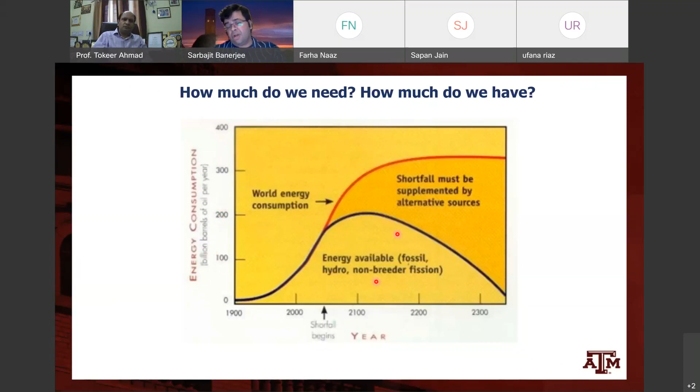And these are some numbers from an article by Lewis and Nocera, and also relying on some analysis in this DOE report. Okay, well, our population in 2001 was 6 billion, projected to increase to 9.4 billion, and then ultimately about 10 billion. So our population isn't increasing as fast as it used to. That's a good sign, but it's nevertheless going to increase quite a bit before it stabilizes, right?

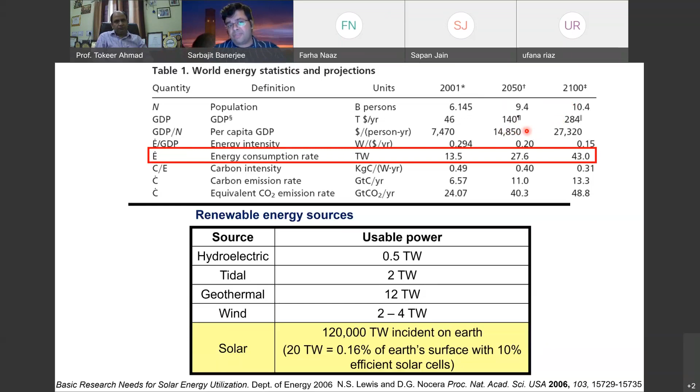The GDP is going to hopefully increase. This is a good thing. And our per capita GDP is also going to increase as more and more populations across the world come out of poverty. And this is of course fantastic. Science is enabling, technology is enabling more and more people across the world to come out of poverty.

But this will require a greater fraction of energy, because the energy that is going to be required to meet the needs of this growing population that has a higher income is going to be substantial. So our energy intensity per person, or per year, will decrease, right? But the energy consumption rate is going to massively increase.

So here are some numbers to keep in mind, and of course there's lots of approximations here: from 13.5 terawatts in 2001 to 27.6 terawatts in 2050 to 43 terawatts in 2100, really big. So by 2050, we're going to essentially need to be producing over twice the energy we were using just about 20 years ago. So this is a huge number in terms of how much energy the world's going to need.

And the carbon intensity of energy is also decreasing. Again, this is a good thing as we are in the midst of this massive energy transition, but is this good enough?

Okay, so this is something we're going to have to consider. Is it good enough to save us from the catastrophic aspects of climate change, right? And so we'll have to think about this. So if you think about where we're going to get this energy from, okay, so we have this massive shortfall that is looming on the horizon.

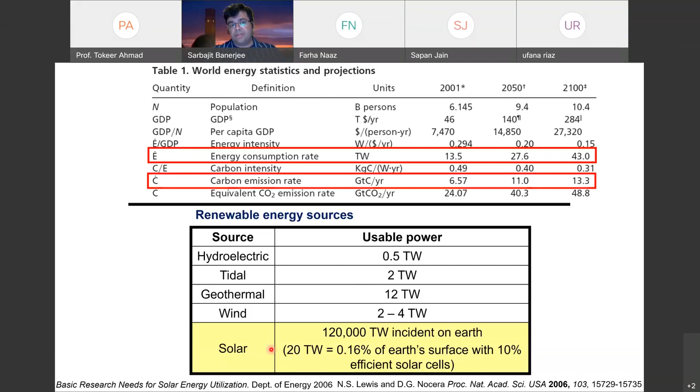Okay, so this is a report I pulled from the U.S. Energy Information Administration as to what are the sources of energy and where do we actually end up using the energy. So if you take a look at these numbers, the big source is still petroleum. Okay, so gasoline, as it's called in the U.S., or petrol as it's called in India, still almost 36% of energy that is used in the U.S. is gasoline, right? Where does it go? Not surprisingly, 71% of this gasoline is used for transportation. 23% of it finds industrial use.

Okay, and one of the things to consider as we talk about energy is of course it's interconnected, right? This is why energy is not just what comes into our homes or what powers our transportation, but it's also our industry. It is also the very way we live our lives, right? So especially as chemists, this is an event hosted by the Department of Chemistry. Our chemical industry is extremely reliant on gasoline as its fundamental feedstock, right? So almost every organic chemical that you buy has started its life as some sort of gasoline byproduct, and so this is something that you can see here. 23% of all petroleum is actually going towards industrial uses, of which a lot of this is in the chemical industry, right? Then you've got 5% going towards residential and commercial, and 1%, so not very much petroleum, of course, used for electricity, right?

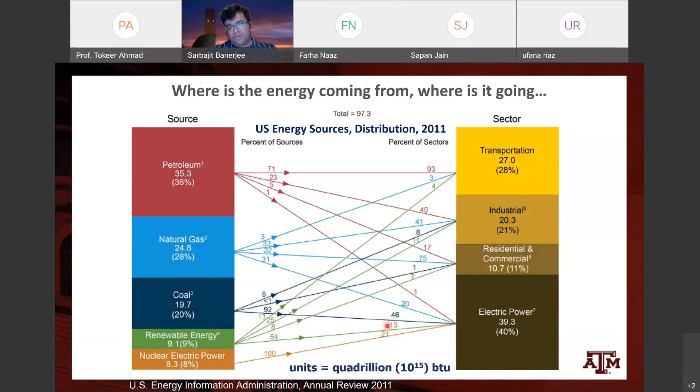So let's break this down a little bit. Let's talk about this part of the grid, the segment here, electric power generation, mostly the electric grid. In my first talk, I discussed this a little bit, but this is something that obviously affects all of us, and we talked about this. The grid is, in a sense, this is a quote from the Atlantic Monthly.

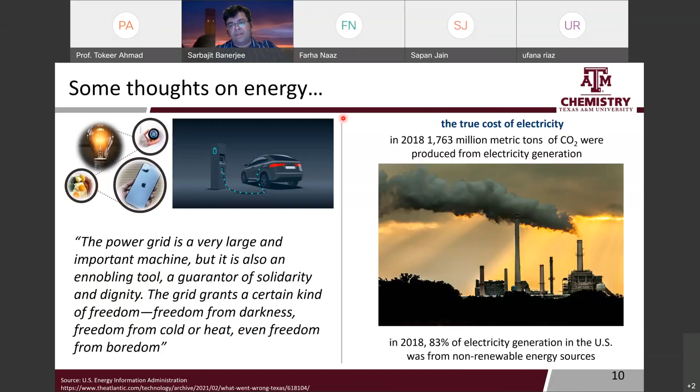It gives us freedom. Having power in our homes, having power in our offices gives us freedom from darkness, freedom from cold or heat, freedom from boredom, and the freedom for me to sit thousands of miles away and talk to you, right? This is all enabled by the grid. But again, this comes at a cost of millions of metric tons of CO2, right?

So let's think about the grid here. Where is this energy coming from? Again, not gasoline, not petrol. Petrol is mostly going towards transportation. A lot of energy coming from natural gas, a big chunk from coal, some from renewable energy, and some from nuclear power, right? So it's a pretty big mix here.

And the grid today is still very much reliant on fossil fuels, on coal and on natural gas, and relatively less so on renewable power like windmills and such. So this is again a quick recap. 2011, natural gas, electricity sources 24.8%. Then we've got nuclear about 20%. Hydroelectric is large among the renewables. Coal in 2011 was very big, about 40%. It's smaller now, right?

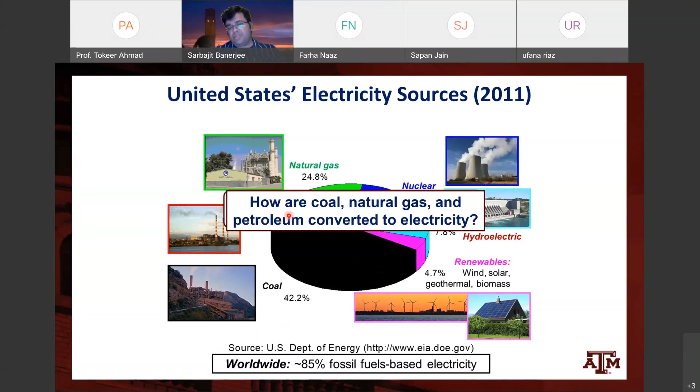So how do you actually convert coal, natural gas, and petroleum to electricity, right? So this is a stylized schematic of a coal-fired plant. This is the chemical reaction for what happens there. Essentially, you burn coal, you combust coal, right? This is an exothermic reaction. So you burn coal, you generate carbon dioxide, and release it right out of the stacks here, along with a whole bunch of other toxic materials.

Coal, of course, is a natural resource. You take it out of the ground, but it's not pure carbon. A lot of it is pure carbon, but being a fossil fuel source, it has sources of sulfur, it has sources of nitrogen, which gives rise to SOx emissions, NOx emissions, often things like mercury emissions, some of which are mitigated at the stack, some of which are not adequately mitigated and are emitted out into the environment.

So you burn carbon, you generate carbon dioxide, and it's an exothermic reaction, so you generate a bunch of heat. You take the heat and use it to essentially boil water in a boiler. The steam that you generate moves a turbine, and the turbine results in power generation, right? So really what we're doing is running a gigantic kettle by burning coal, to boil water and to move a turbine, right?

So it's not very efficient in many of these processes. Combustion is not very efficient. The boiling of water has inefficiencies, and then of course the catastrophic consequences of emitting all this carbon are pretty obvious, right? And a similar idea with natural gas, methane as an example. You burn methane and you generate CO2 and water and heat, and again use that heat to run boilers and essentially run a turbine, and that allows you to generate power. Again, you emit carbon dioxide and water vapor out into the environment.

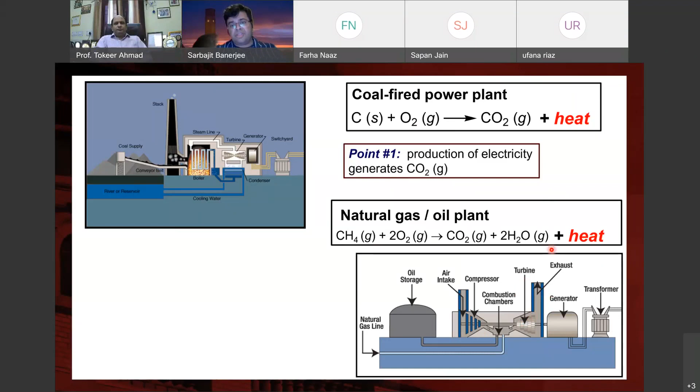So point one, essentially you can see here the production of electricity generates carbon dioxide, right? So this is a major problem.

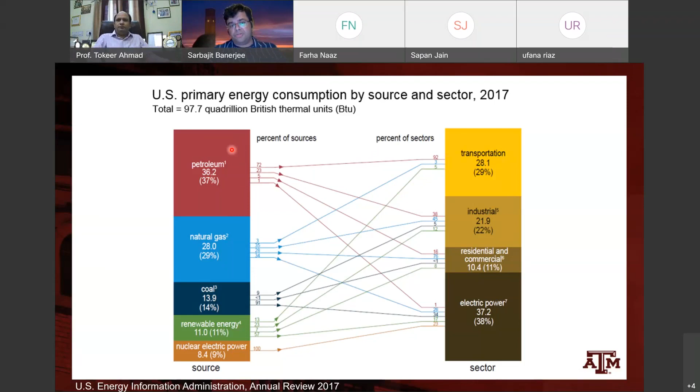If you consider transportation, if you take a look at this part of the picture here, most of the energy for transportation is coming from petroleum. Some of it is coming from natural gas, and only a minor fraction in 2017 coming from renewable energy, about 5%, right? So very heavily dependent on petroleum as our means of mobility. This is true for cars, airplanes, and ships. So we're extensively dependent on gasoline, on petrol to run this. And again, the reaction there, the fuel, essentially hydrocarbons, right?

Hydrocarbons that we combust using oxygen to generate CO2 and water. So one more point to keep in mind, just amplifying the previous point, is that internal combustion engines also will generate CO2, right? And so this is the challenge here. Most of this, again, coming from petrol, right?

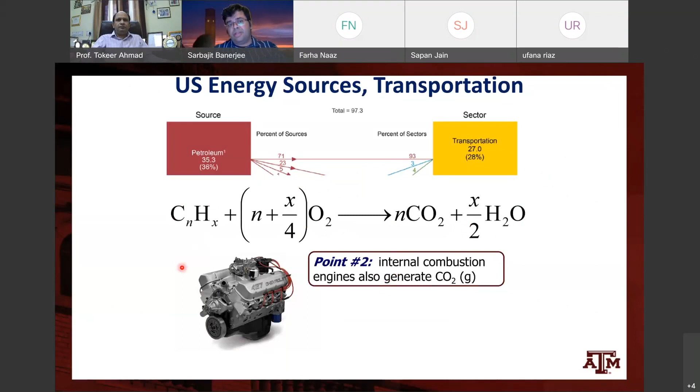So historically in the U.S., and this is something to keep in mind, if you go back and look at the literature 15 or 20 years ago, people were predicting a much sharper acceleration of the green energy transition. It's been slower because it's a moving target, right? Fracking and enhanced oil recovery methods have made extraction of petroleum much easier.

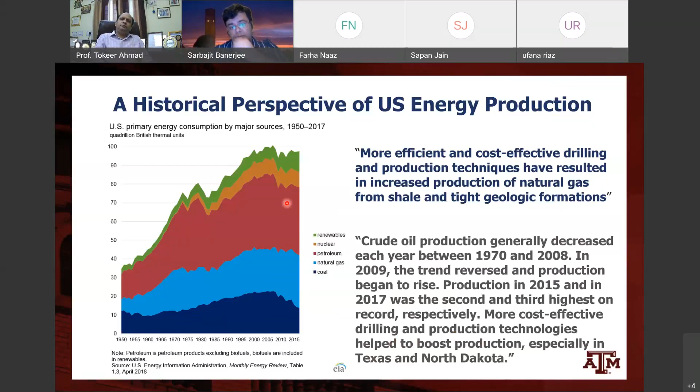So worldwide projected reserves of accessible petroleum have really dramatically increased, and there is a boom in the production of oil in the last couple of decades, especially in West Texas, in the Permian Basin, and in North Dakota, where cost-effective drilling and production technologies have led to this massive resurgence of petroleum production, right? And this has renewed the idea of energy independence in the U.S.

But one thing to keep in mind: as we exhaust our sources of light crude oil, we're moving more and more into heavy crude and unconventional deposits, and they can yield reasonable quality oil, but oftentimes the processing is a lot more energy intensive to produce the same amount of oil. They also typically have very high sulfur content. So lots of processing required, and danger of SOx emissions and such, right?

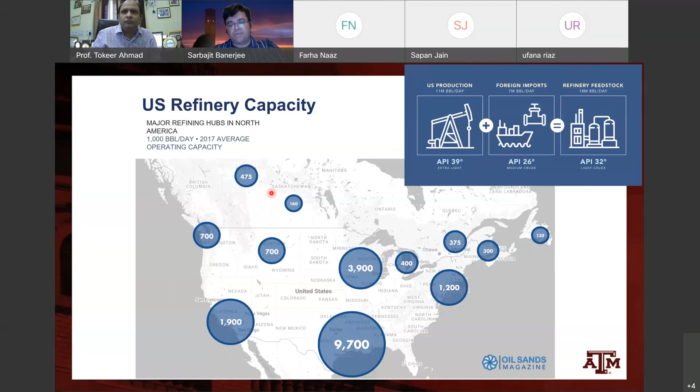So light sweet feedstock, we're still doing okay. This is Saudi crude, this is West Texas crude, and it can be handled relatively easily. But more and more, there's a reliance on heavy sour crude coming from Canada and Venezuela, which requires much more complicated refineries. But I also want you to think about this for a second. These systems are extremely complex in their interconnections. So look at all of the products that come out of a refinery, right?

On the one hand, you've got gasoline. This is what most of you use every day, whether you drive to work, drive a motorcycle, or get on a bus. You're typically burning gasoline. But then there's also liquefied petroleum gas that you might be using for cooking, and naphtha, and both of these are huge precursors for the entire chemical industry, right? Our plastics industry is heavily reliant on these lighter fractions providing precursors.

Then you've got diesel, jet fuel, fuel oil, which is often used in ships, so lower quality, and then the residues, right? And asphalt is used for making roads, as a vital component of infrastructure. So when we talk about petroleum, we're not just talking about gasoline and electric vehicles, but also our chemical industry and our infrastructure industry. The transition that is coming will profoundly affect not just our energy needs, but every possible industry.

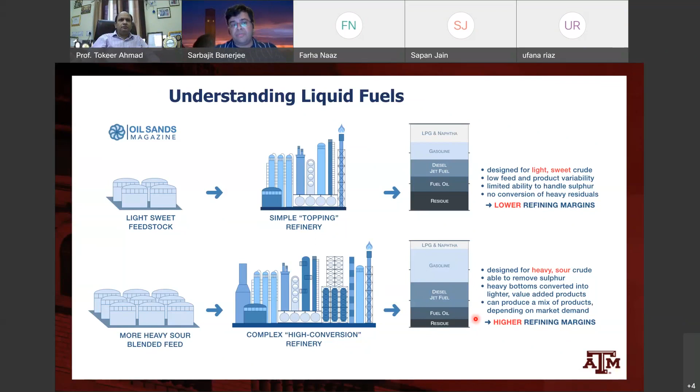So why are we so addicted to gasoline? Okay, there's some really easy science here. This is chemical energy density, right? How much energy is stored per kilogram in the bonds of gasoline? How much energy is stored per liter volumetrically in these different fuels? I talked about hydrogen as a fuel on the first day, and that's what Dr. Ahmad also works on in thinking about photocatalysis and understanding solar fuel production.

But let's compare gasoline and diesel to hydrogen, right? Hydrogen's specific energy in megajoules per kilogram is very high because hydrogen is very lightweight, right? But where it doesn't do so well is in terms of megajoules per liter, right?

So the volumetric energy density is just amazing and really unprecedented for these fossil fuels. And this is what allows you to have a relatively compact gas tank or petrol tank in your car that can take you hundreds of kilometers, right? Thousands of kilometers with relatively little fuel powering this through, right?

And so where things like hydrogen are very light, they require a lot more volume. So you can see this for a comparison to different fuels. So the chemical energy density has really been difficult to overcome. And I want to show you another example here, right? There's just several versions of the same exact plot, and you can see where diesel and petrol is here. And then you look at lithium-ion batteries as a comparison. Okay, also much less effective in terms of how much energy you can store per weight, how much energy you can store per volume, right?

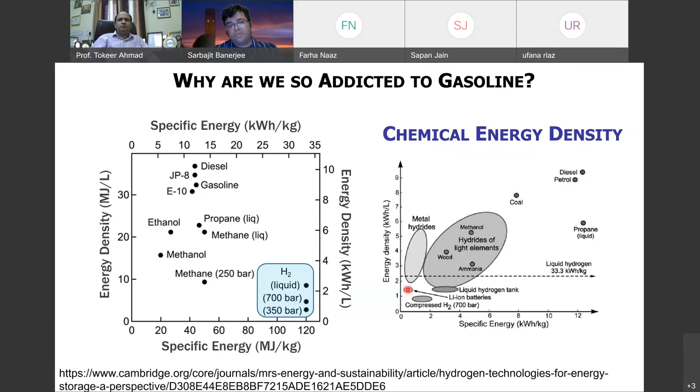So you can see why gasoline has maintained the predominant position for so many years. It's got fundamentally some incredibly good properties in terms of chemical energy density. And we talked about this on day one: the fundamental idea of storing energy in the form of chemical bonds. Well, gasoline is a very effective way of doing so, particularly from the perspective of volume, right? And so replacing it really requires a lot of work, right? A lot of work in terms of storage, a lot of work in terms of everything else.

So energy density, the cost, the weight, and size of onboard energy storage are really important characteristics of fuels for transportation. Fuels that require large, heavy, or expensive storage can really reduce the space available to convey people or freight, and really make a vehicle operate less efficiently, or can make it too costly, even if you take into account cheaper fuel.

So if you're going to end up taking a lot of space just storing the fuel that's going to move you forward, so that you can't actually carry enough people or enough freight, that makes the whole thing much more inefficient. So compared to gasoline and diesel or petrol, other options may have more energy density per unit weight, but none of them are really competitive in energy per unit volume, which requires an entire redesign of how cars work, how transportation works, right?

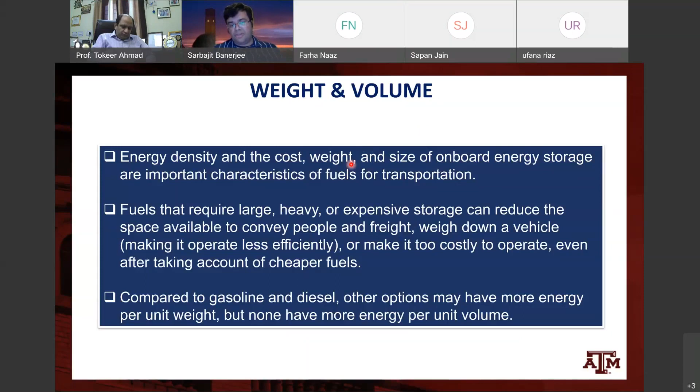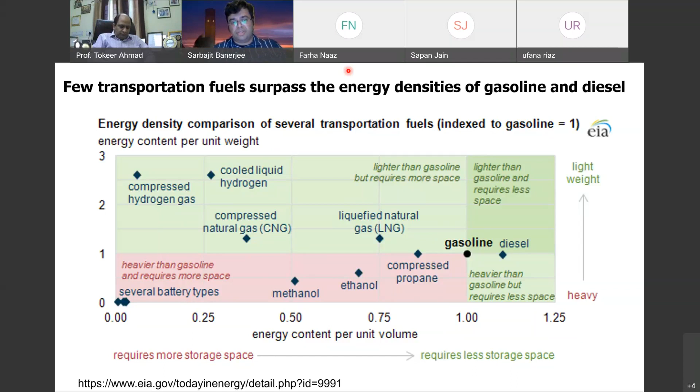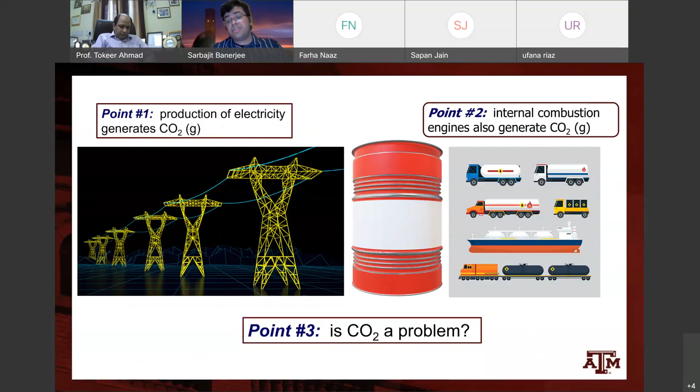So we talked about two problems, right? Just going back, production of electricity generates CO2. Internal combustion engines generate CO2. Is CO2 a problem? Well, I think we know it is. So CO2 observations at the Mauna Loa Observatory in Hawaii go back to the 1850s, and we've seen this huge increase, right, from 290 ppm to about 380 ppm now, and this number has been quite scary.

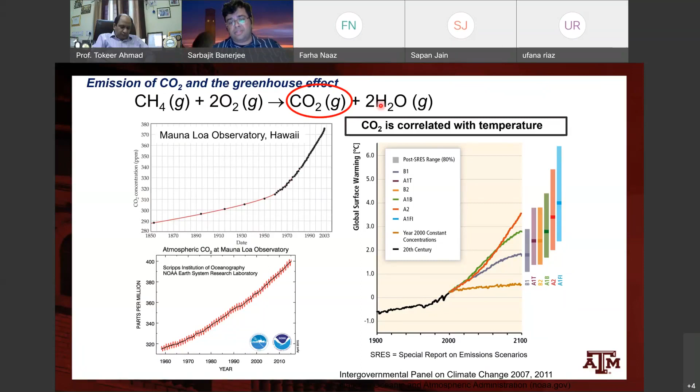These are independent measurements at the Scripps Institution of Oceanography Observatory, and we know that the amount of CO2 in the atmosphere is correlated with temperature, and this has led to this huge quandary that we find ourselves in right now. So essentially, our current energy consumption strategies are not sustainable, and we need alternative carbon neutral energy sources, right? And if you think about the magnitude of this problem, this is so huge, right?

It's such a huge problem. I talked about, we are going to need to double by 2050, which is not that far away. 2050 is, I would think, in our lifetime, certainly in the lifetimes of the students attending this seminar, right? We're going to have to come up with double the amount of energy that we need today. And then we're going to have to come up with double the amount of energy while

dramatically reducing our carbon footprint while dealing with a larger population, a substantially larger population, and a population that has greater needs. So there's a lot of changes coming in the next 2 decades, 3 decades. It's going to be a very critical time, but really we're going to need a lot of scientists on board to solve these challenges.

So here's where we are, right, in terms of CO2 emissions. This is sort of 2020, and we've had over 1 degree C rise in temperature, and you can see the prediction here: as the CO2 emissions keep increasing, in the different scenarios, we're going to have maybe a 4.5 degree C rise in temperature by 2100. So this is a scenario of unmitigated growth where nobody cares and does nothing. We're going to end up with 4.5 degree C rise.

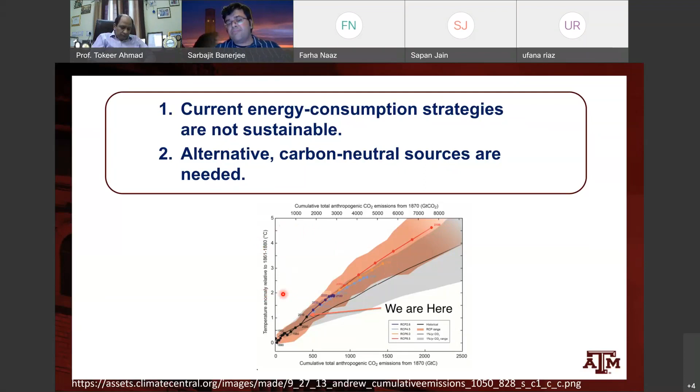This is going to be catastrophic across the planet. 4.5 degree C rise will mean melting of large amounts of polar ice caps and rising sea levels and natural disasters across the world, right? A little bit of a more moderate scenario right here. And then as you think about some more mitigated scenarios, this is the ambition of the Paris Climate Agreement: can we keep emissions below 2 degrees C, or at least below 1.5 degrees C, right?

And again, just to also keep in mind, we always talk about CO2, but it's not just CO2. Methane is also incredibly dangerous as a greenhouse emission, and NOx, as well as SOx and hydrofluorocarbons and so on and so forth are also major contributors. So global warming, like I showed you a couple of slides ago, depending on the choices we make now, will determine what happens in the next 20 years, the next 50 years, the next 100 years. Are we going to have 4 degrees C, 5 degrees C rises in temperature?

So in Paris, we had this historical agreement that basically said that we're going to limit the temperature rise to 1.5 degrees C. This is a very ambitious agreement, but this is going to require an incredible amount of new science and technology and concerted action by policymakers across the world, right? And so this is a slide I got from Dr. Julia King, who is on the UK's climate change committee, and she's plotted different scenarios here.

So if we go with business as usual, hopefully by 2060, 2070, people will finally start to mitigate greenhouse emissions, but it's going to be too late in the sense that we're going to have a very significant rise in our CO2 emissions and the overall emissions that have accumulated. So if we are going to stay below 2 degrees C, and this is 2020 right here, we're going to very soon have to sharply curtail CO2 emissions, sharply curtail other greenhouse gas emissions.

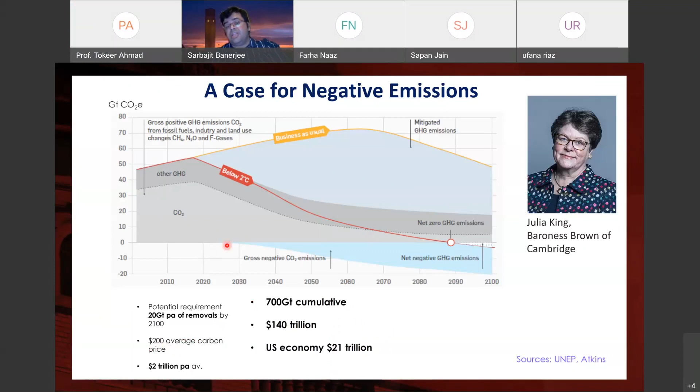The size of the entire U.S. economy is 21 trillion. So about 10% of the size of the economy is the cost of taking carbon out. So you can think about this as this incredible task that the generations have in front of you, but also an entirely new industry that doesn't exist right now that is going to be needed, the idea of taking carbon out of our atmosphere.

Right. So this is a slide again from Dr. King showing some of the Intergovernmental Panel on Climate Change model pathways. How do we stay below 1.5 degrees C increased temperature rise? So you can see there's 4 different scenarios, and depending on the scenario, we're going to have to remove more and more gigatons of carbon dioxide from the atmosphere.

So you can see the first scenario, if you're extremely aggressive now, right away, where social, business, technological innovations push reduced energy demand by 2050, and by downsizing our energy system, by really having a very aggressive energy transition, we can do this mostly by just afforestation and land use. And this afforestation is the only carbon dioxide removal option, without directly needing carbon capture and storage. So this is possible, but our time's running out.

This is going to need very aggressive, concerted worldwide action. I think it's pretty safe to assume that this is not going to happen, because the world where it is now, especially post COVID-19, with all of the economies in disarray, there is not a whole lot of interest across the world in this sort of a sharp transition.

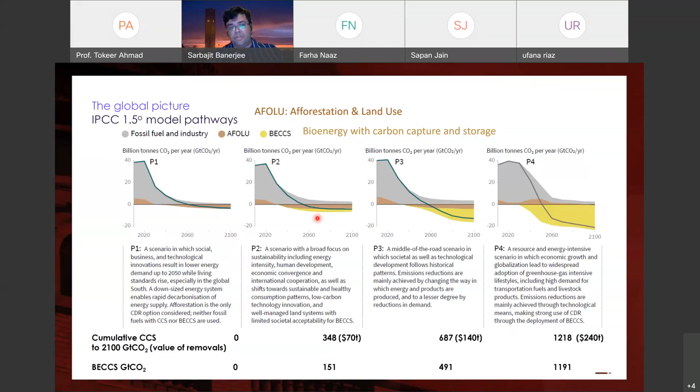But at the same time, we're going to have to address carbon emissions. And so as a society, as scientists, we're going to have to converge on some sort of medium where we mitigate the use of carbon intensive sources, and to the extent that we cannot get rid of them, we have to have negative emissions technologies, as well as afforestation and land use that counteract these effects and capture some of this carbon back.

So a difficult problem, the challenge of a generation. The last 2 years have seen an incredible amount of science as the world has tackled COVID. This is going to require global effort, bringing together the best minds across the world.

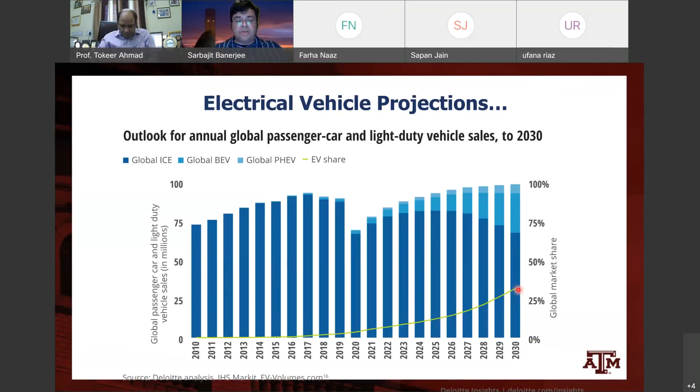So this is something that has greatly accelerated, and we'll talk about this in a few seconds. But again, still lots of progress to be made. All right, so if you take a look at this as a percentage of the market share, the US EV market share, even by 2030, is still a relatively lower number. Again, this is the global number here, about 30%.

Okay, which means that the number of cars are increasing. Even though this increases, this still means that a very large predominant majority of cars by 2030 are still petroleum-guzzling, gasoline-powered vehicles, right? So there's still lots of work to be done to accelerate these slopes to make sure that they go higher. And you can sort of see in some senses what is going on here.

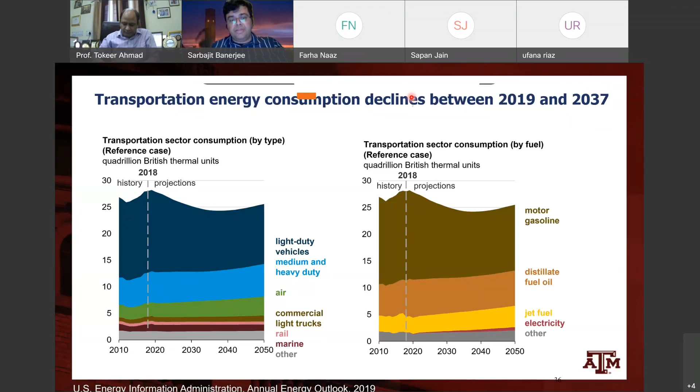All right, so right here again, predictions for energy consumption. One direct area where people are making a lot of progress is electric vehicles. So transportation is going to decrease, at least in the near term. Again, electric power, as we have this shift towards renewable energy, we're going to see at least a slight dip, but industrial energy consumption will increase.

So what factors are driving increased adoption of electric vehicles? Well, one, changing customer sentiment. Again, this is something I took out of Deloitte's report. They've done a very extensive study. Policy and legislation, in particular, things that are happening across the world.

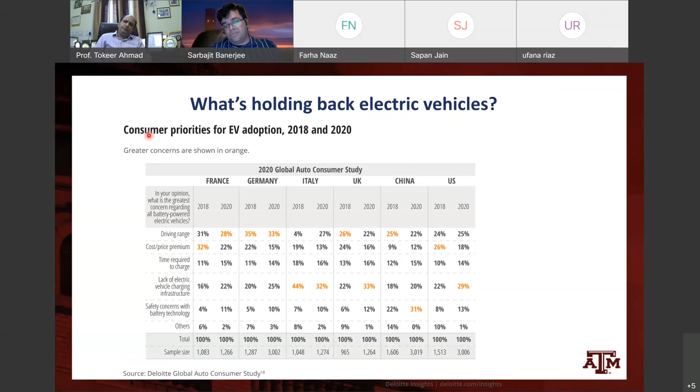So this is an example of where very fundamental discoveries in science are rapidly finding use in technology and then changing our world, right? So this is, again, a message to students to really think deeply and get involved. So, the grid of the future we're headed to. Lots of exciting stuff happening in the electric vehicle space, in the transportation space, but lots more to be done.

Nuclear is relatively clean technology, but really hurt very hard by, number one, the Fukushima disaster, and number two, our inability to have a long-term solution to nuclear waste anywhere. Where do we store this waste? What do we do with it? This remains a humongous problem.

And then renewables rapidly rising, but still only about 30%, perhaps even a little bit less. This is in the US, globally perhaps a little bit less. And natural gas continuing its rise as fracking technologies make this fuel available, right? And within the renewables, like I talked about, the biggest rise is going to be solar PV. Hydroelectric is already fairly saturated; there's only so much you can do here. And then some increase in wind from where we are right now, and geothermal.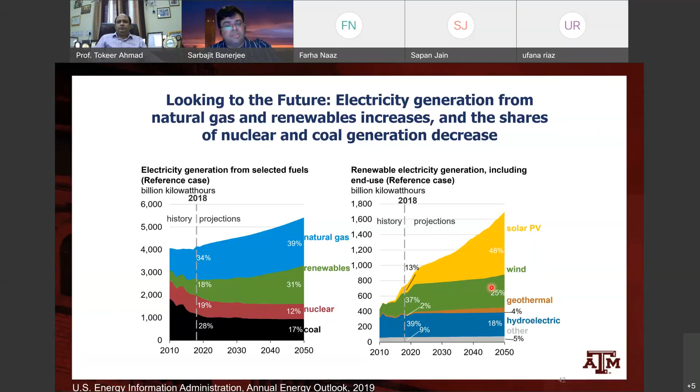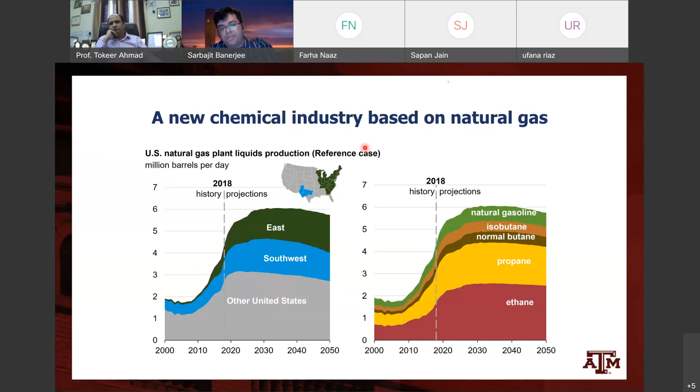And another point I want to make, we are also going to see a big shift in the chemical industry as gasoline production changes, again, moving much more towards natural gas products in the chemical industry. So big changes in the grid, but again, the major thing to worry about is carbon dioxide, right?

So I showed something similar in my seminar a couple of days ago on day one. Over the last 4 years, the cost of solar panels has dropped tremendously, by almost 50%. And we're powering about 12 million homes in the US with solar. But there are cloudy days, and with wind we've had a massive increase in capacity, 400%. But again, there are still days, so we're going to have storage coupled to solar, coupled to wind, to better utilize these technologies. This is kind of an interesting trend.

I just want to talk about Germany. Germany's been a real pioneer in making the energy transition extremely well planned, and the hope is that they will completely phase out by 2040 all coal power, all nuclear power, and really move to renewables and perhaps ultimately fusion as a means of providing their energy needs.

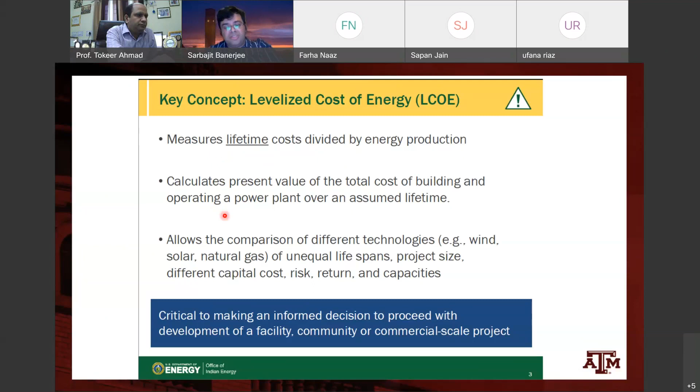A couple of concepts that are somewhat market-based that I want to introduce. One idea is the levelized cost of energy, which measures the cost of energy over the lifetime of the plant. And the reason you need this is when you're comparing all sorts of different fuels and different energy technologies, it's important to put them on the same scale. So this is from the DOE.

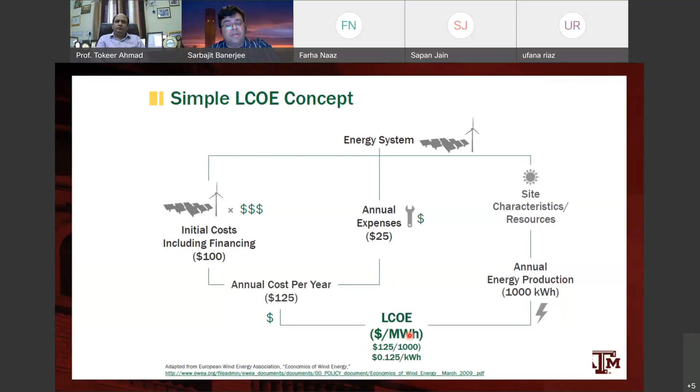So if you think about this and say, well, for a power plant, it's about $100 an hour for the initial costs and financing. The annual expenses are $25 an hour. So then the annual cost per hour per year is $125. It produces 1,000 kilowatt hours. So we basically say our LCOE, the levelized cost of electricity, is $125 per 1,000 kilowatt hours, per megawatt hour, right? So the LCOE is an important metric.

It is the installed capital cost and the operating cost, converted to a level stream over the entire financial lifetime. And this is really important because a lot of times you might have one energy generation technology that's going to be 5 years, another one that's going to be 20 years, and so putting them on an annualized basis is really important, right? And then also thinking about what is the cost that you have to pay upfront. A lot of the renewable energy technologies require an initial investment, but then not as much recurring costs.

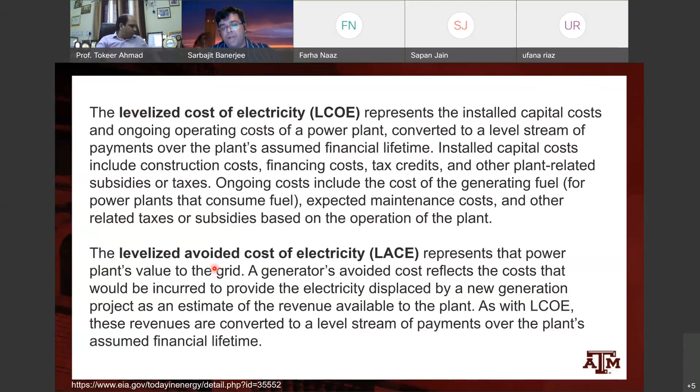But the other thing to think about is the levelized avoided cost of electricity, which basically reflects the cost that would be incurred to provide the electricity displaced by a new generation project. So if this project did not exist, what would you have to do to come up with the power that is needed? So that's the levelized avoided cost of electricity, right? And so power plants are considered based on comparing these two values, the levelized cost of electricity and the levelized avoided cost of electricity. And you see this here.

Solar PV's economic competitiveness is relatively high because of tax credits and also the declining costs of solar. So basically, solar PV is going to remain economically competitive across the country, and because solar PV provides electricity during the middle of the day, when you really need electricity and when electricity prices are relatively high, the value of photovoltaics to the grid is really high.

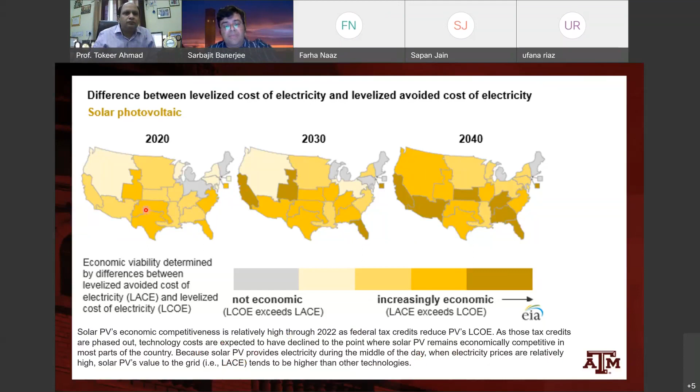So when you think about what you would need to replace the solar plant, in calculating the levelized avoided cost of electricity, the price of replacing the solar is quite high. So solar is very often the best alternative, because it's giving you power in the middle of the day when you need it the most.

So natural gas combined cycle is high for now, and this is not the best news for renewable energy, but it's not going to be something that lasts for a long time, because ultimately the prices will increase for natural gas as we start running out of this resource.

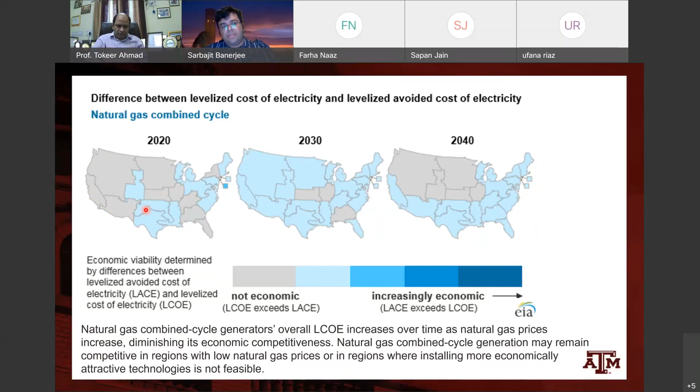Okay. All right. So solar cells, what do they do? How do they work? Silicon and beyond. So solar cells convert. What do they do? Well, they convert solar power to electric power, right? Electrical energy. That's the idea. So the basic requirements for solar to electrical energy conversion: you want to have light absorption, right? So something's going to have to absorb the light. That something is usually a semiconductor.

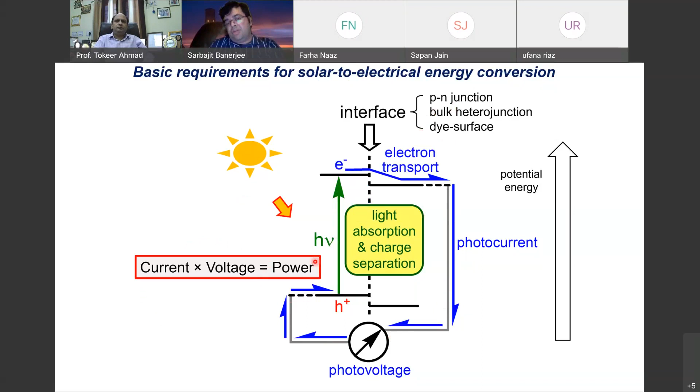Separate the electron and the hole. So you excite an electron over here, and you have the hole here, and essentially the electron moves through an external load, and you generate a current, right? And it recombines with the hole, and you repeat the process all over again. So this is the idea. And you can have an interface that's either a PN junction or a bulk heterojunction or dye sensitized solar cell. And then the current times the potential difference gives you the power that is generated. Okay, so this is a very simple description.

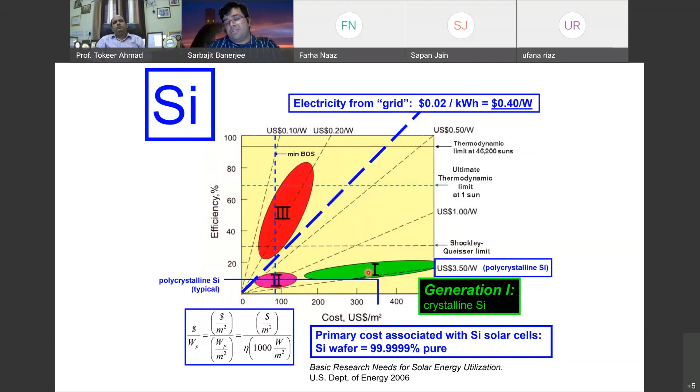So if you ask yourself the question, why don't we have a world full of solar cells? It's primarily limited by this combination of the efficiency we get times the cost that we have to pay for it, right? Generation 2, again, Dr. Sarma, D.D. Sarma, introduced this idea, so I'm not going to go too much into detail about this. These are dye-sensitized solar cells, or amorphous silicon, or quantum dot, or like these organic PVs. They tend to be relatively lower in terms of the efficiency, but typically much better in terms of cost.

But well, again, why is it that we don't end up covering the world in these cheap, low-performance solar cells? And I'm going to come to this again. The challenge is it's not just the solar cell; it's everything around it that has a certain cost. And even if you make the solar cell incredibly cheap, the balance of systems cost associated with it is not going to come down below a certain value. So again, this is a practical limit that's shown in this blue line: you're not going to come down below the cost. Your efficiency is still sort of low. So really, where we would like to be is Gen 3 right here, where you get very high efficiencies and you're still much lower cost, ideally even pushing lower below the BOS idea.

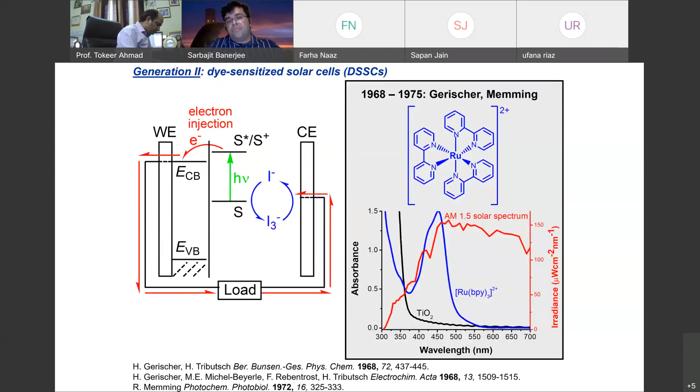So okay, this is something to think about. It's a charge separation. So we talked about dye-sensitized solar cells. This is a simple idea introduced by Michael Grätzel. Grätzel type solar cells. Again, you excite a dye, and then you get the electron to move through, and you end up regenerating the hole here using an iodide/triiodide couple. And again, the electron moves through. So this is not as efficient, but it can get pretty good, and they're relatively low cost. People use titanium dioxide along with these dye molecules, and you can get a really good combination. So inexpensive materials and high interfacial area to promote separation of charges.

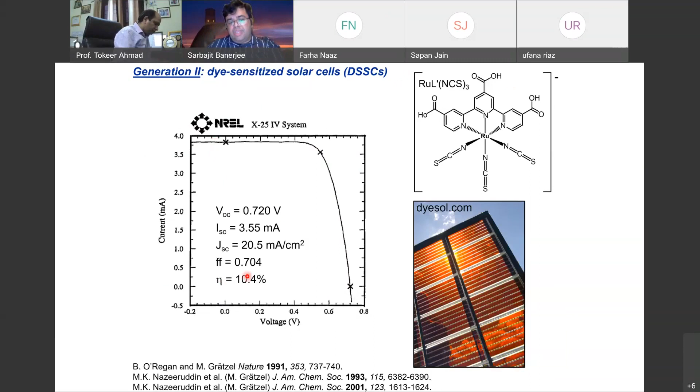So the original configuration of this is really basically nanocrystalline TiO2 with different sensitizers. Okay, and this is again some of the best dye-sensitized solar cells measured at NREL. We have about a 10% efficiency, so substantially lower than silicon. But again, what makes up for it is the price.

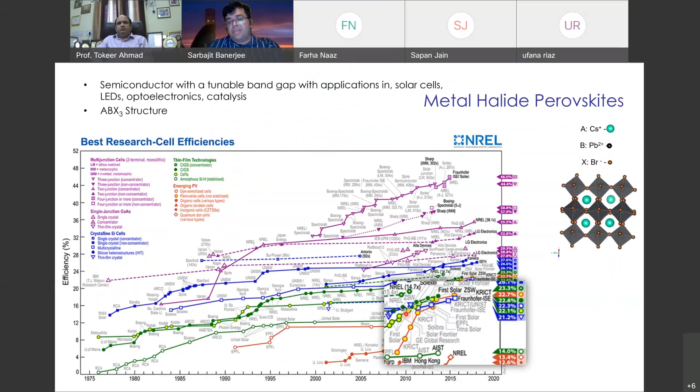So those are some ideas to sort of go beyond this Shockley-Queisser limit that I'm sketching here into this regime of higher efficiencies, and then also hopefully pushing down in cost meanwhile. So this is something to keep in mind. This is the next generation. You heard about perovskite halides, tandem solar cells, up and down conversion, quantum dot based cells, and you can sort of see this here, massive increase in the perovskite halides over this last decade.

Okay, so I will just take 3 or 4 minutes to now finish up. One of the challenges with solar and with wind is, of course, and I showed this graph the other day, the capacity factor, which measures how often a plant is running. A power plant with a capacity factor of 100% means it's doing very well. But this is quite low for solar, right? Because the sun is only shining for a few hours, and so this essentially means that we're going to need energy storage, lots and lots of energy storage.

There's lots of different options for energy storage. And again, you can sort of classify it based on how much energy you want to store, and then how quickly you want to discharge it back. So, for example, a flywheel stores relatively small amounts of energy, but you can very rapidly get it back. Batteries can store more, and you can get it back reasonably quickly. And on the other hand, you've got something like pumped hydro or hydrogen, where you can store a lot of energy, but relatively slow in discharging.

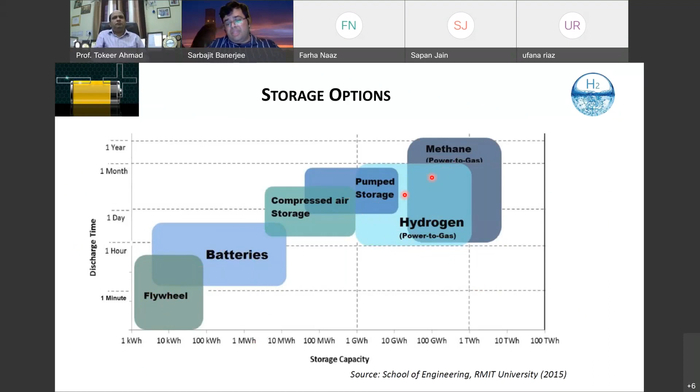So another version of this figure, energy storage. Okay, we generate a lot of energy using solar and wind. What do you actually want to do with it, right? In terms of storage, do you want to just use it for uninterrupted power supply? That's what UPS means. So essentially, just for short bursts. So supercapacitors can do that. Flywheels can do it, especially high energy supercapacitors, all kinds of batteries.

You want to use it for load leveling, so shifting the load. Lots of opportunities here. And as you go into relatively large amounts of energy that you don't have to get back that quickly, then these redox flow batteries are especially good. And then at the very high end for bulk power management, pumped hydro and compressed air energy storage are good. Most of the energy storage, at least at the grid level right now in the US, is pumped hydro. So essentially we use the energy to move water uphill and then let that come down when we need it. For the other 6%, it's sort of a mix between battery and thermal storage, right? So this is to keep in mind.

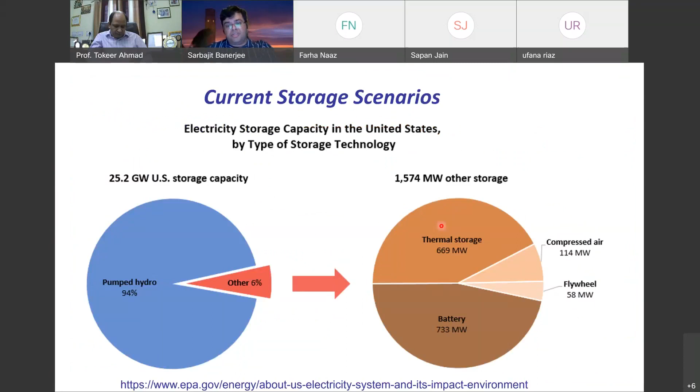And again, it's not just energy storage. We're also going to have to think a lot about carbon storage. So this is going to be important. And I have 2 lectures coming up. I'm going to skip this for now.

But okay, so as the energy transition accelerates, we are in the midst of a millennial change in energy patterns, which is going to have profound consequences for industry and our way of life. And what we really have to think about is how do we accelerate the energy transition through advances in energy conversion and storage, and energy storage either through hydrogen or batteries or through pumped hydro, redox flow batteries. These are all an important part of the puzzle.

And energy is not enough. We also will have to do something about carbon, including most likely about negative emissions. How do we take carbon out? And then international cooperation. We really share the same planet.

We have to work together across the world to meet the goals of the Paris Climate Agreement. And for this generation, there's never been a more important problem to work on. There's never been a more important time to work on it. So on that note, I think I'm going to stop here.

And day 4 tomorrow will be batteries, and then day 6 will be thinking a little bit beyond conventional batteries to what comes after, and then also thinking a little bit about carbon on that day.

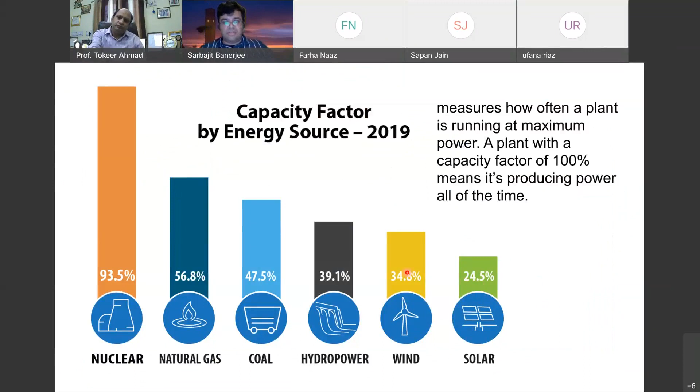I think people are doing the best they can with what they have now, but ultimately for much more widespread adoption, A, we're going to need to be here, and B, we're going to have to address the fact that solar is the absolute worst in terms of capacity factors. Okay, so solar is our only alternative because there's no real sustainable options out there, but we're also going to have to do something about these numbers here: having storage linked up to it, having more efficiency, having lower costs. And again, at least the efficiency is a scientific challenge.

How do you overcome the Shockley-Queisser limit? How do you do multi-exciton generation? How do you essentially work on all of these challenges on hot carrier extraction? So these are all issues that I think will be ultimately solved by science.

The next question is from the electrochemistry perspective: where does electrochemistry play a role in power generation? Do you have any statistics to see the growth of it? So electrochemistry is, of course, everywhere, right? If you wait for my lecture tomorrow, we'll talk about batteries, which is, of course, at the heart of this. My first lecture was about photocatalysis hydrogen generation.

Now, clean hydrogen generation: there's lots of hydrogen used, but mostly coming from methane steam reformation, not electrocatalytic hydrogen generation. Clean hydrogen generation is still extremely lacking. It's not a major contributor yet in the world, not even at the level of 1% of the global energy scenario, primarily because we don't have good catalysts, because the efficiency of the catalyst is low, which requires these large stacks. So lots of work to be done, but clearly electrochemistry will be key.

And the other thing I want to mention, and this is my lecture a couple of days from now, is we were simultaneously discussing not just energy storage in the form of batteries, but also what are we going to do about carbon? And I think carbon dioxide reduction is a huge frontier for electrochemistry. So not just doing hydrogen evolution or solar fuel production, but how do we do solar carbon dioxide reduction? I think that there's lots of opportunities here for electrochemistry.

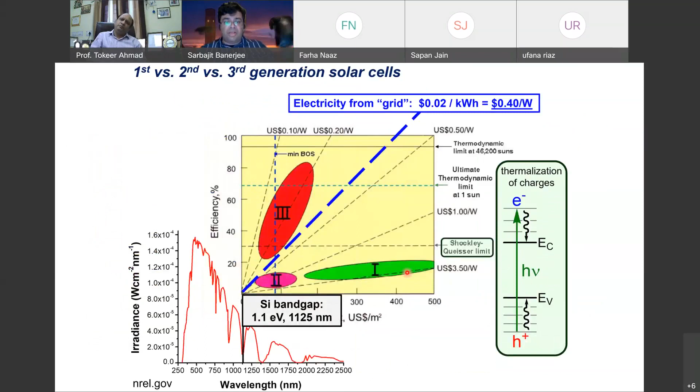The next question is, can we recycle silicon solar cells? Yeah, so there's a lot of work being done, and of course, it's a great idea. It's a great thing that has to happen. As you saw, one of the biggest costs of solar cells is from the fact that we need 99.9999% purity, right? So if you've got a good silicon solar cell that's already very pure, processing that is going to be much easier than trying to make silicon from sand.

Silicon solar cells are still relatively new, right? So there's not a lot of stuff yet, but as this comes online, I do think this is going to play a big role in dropping the cost. So I think as recycling becomes a major part of this, we'll drop costs. We'll also drop the carbon costs associated with production of solar panels, which will also be great.

The next question is also related to silicon. It is: which materials are best to be coated on crystalline silicon to improve its efficiency in solar cells?

Okay. So I think maybe what you're asking about is tandem cells, where you've got multiple materials doing this. Okay, and it really depends on what you're trying to do. You might be trying to capture some very high energy light using a band gap that is large, or you might be looking to capture some near infrared light. So there's all sorts of hybrid options there using other semiconductors, right?

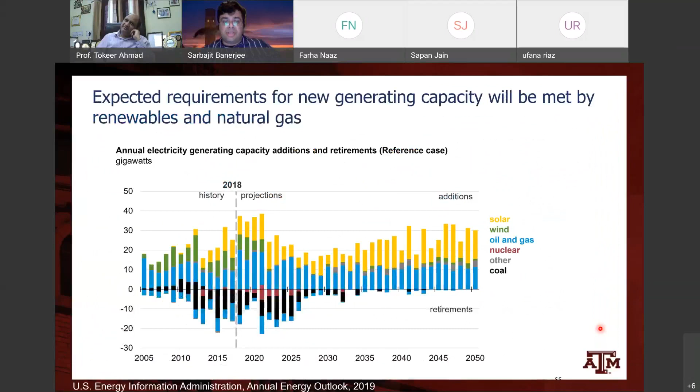But at our current pace, we'll probably have to go up to 2075 or 2080, perhaps not even in our lifetimes, before we will have full renewables. And part of this, of course, is political too, right? What are the policies? What is the global technology transfer, the technology sharing that happens that facilitates this?

The next question is based on power plants. Are hydrogen burning power plants feasible in the future? Oh yeah, sure. I think so. There's already a lot of interest in things like hydrogen co-production with all sorts of other industrial processes, and I think one can very easily envision hydrogen co-production also being used for power generation on site.

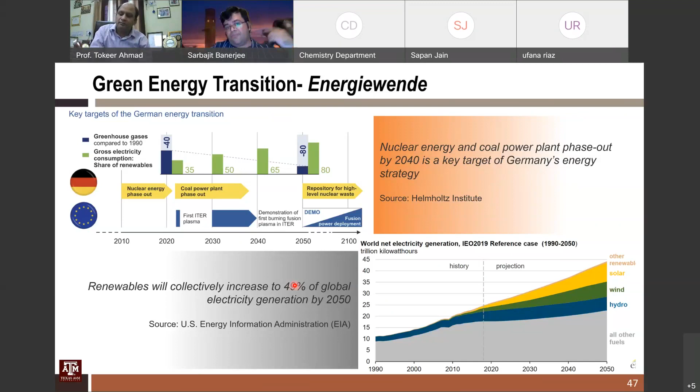Okay, so the last question is, why is it required to separate electrons and holes if the electric field at the depletion zone does this for us? Well, maybe I don't fully understand the question, but ultimately you're going to have to flow the electrons through an external circuit to generate power, to generate a current. So essentially, at the depletion zone, you're absorbing light and you're generating electron-hole pairs, but you need to separate the electron-hole pairs and have the electron flow through the external circuit.

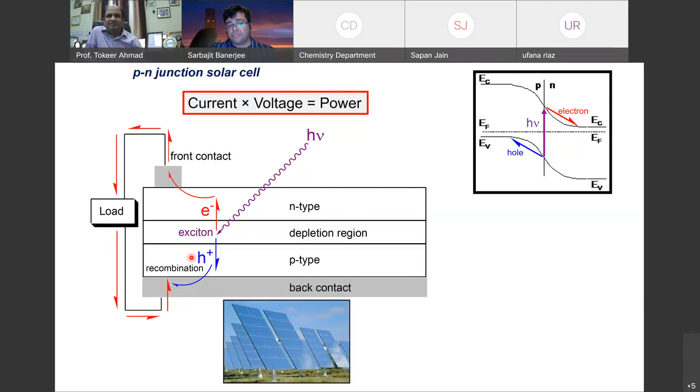There's another question that has come up. Is supercapacitor a good choice for energy storage as compared to electrochemical energy storage? That's a very, very good question. Supercapacitor has a role, I would say a limited role. Supercapacitor research has been going, they've been really increasing how much total energy density they have. But really the role of supercapacitors conventionally has been for storing a bunch of energy and getting it back in very short order, but not long-term storage. So there's not a lot of energy you can store, but you can get it back very quickly. Okay, so that's the role of supercapacitors.

And this is not entirely true anymore. People are designing high energy capacitors that will go into kilowatts and tens of kilowatts. So this is true, but still the purpose of a supercapacitor is much more in this power quality regime, not really bulk power management, not really load leveling, but essentially saying, okay, I have a fluctuation in my grid, my high energy supercapacitor will help me balance this out.

And this is going to be inevitable as we move to intermittent sources like wind and solar. There is a real risk of deterioration of power quality. So we're going to have some balances in place and some ways to buffer that. And supercapacitors will have a role, but much more short term than anything else. So there's really no alternative, ultimately, to batteries.